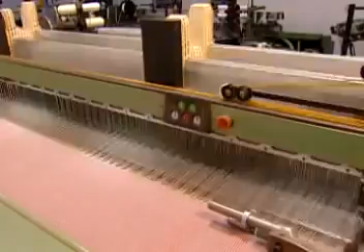In this segment, we describe how filling yarn is actually inserted into the fabric. Several systems are used to insert the filling. These include shuttle, rapier, projectile, air jet, and water jet.

The shuttle loom was the first type of power loom developed. It uses a shuttle, a boat-shaped device that holds a small quill of yarn. The shuttle is the only powered insertion system that carries its own yarn supply across the warp. The maximum speed of these looms varies with fabric width, but most produce between 150 and 200 picks per minute.

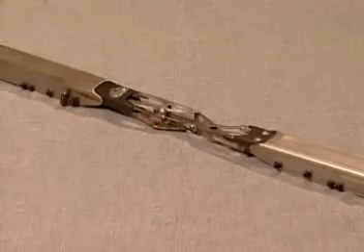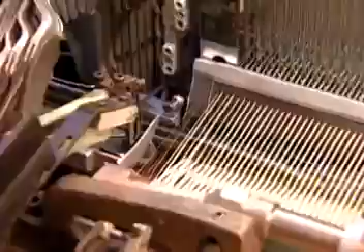Rapier filling insertion is one of the most versatile insertion types. This is due to the rapier head gripping the yarn and carrying it across the width of the shed. Therefore, any yarn, from extremely fine to very coarse, can be woven. Also, very different yarns can be woven from pick to pick without readjusting the rapier.

There are 4 types of rapier systems: single rigid, double rigid, double flexible, and double telescoping rapiers. The single rigid rapier uses a solid rod material that carries the yarn completely across the warp. This loom footprint requires twice the floor space because when the rapier is not in the shed, it is housed in a sheath external to the shed.

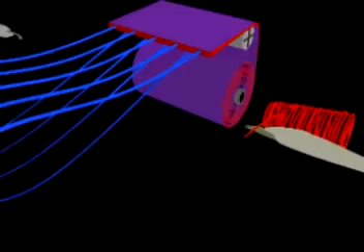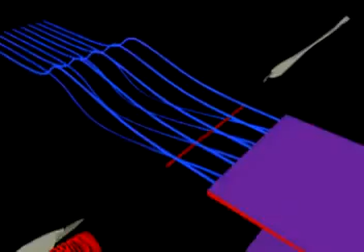Double rigid rapiers use 2 rapiers that are just over half the width of the warp. Each transfers the yarn halfway across the warp shed. This still takes up the same amount of floor space as a single rigid rapier because each rapier is stored on either side of the loom. However, the speed can be increased because it takes less time to insert a pick, since each rapier has only half the distance to travel in the shed.

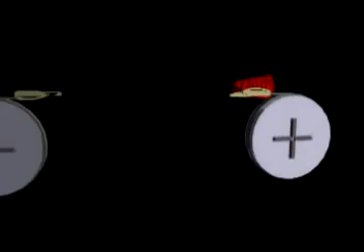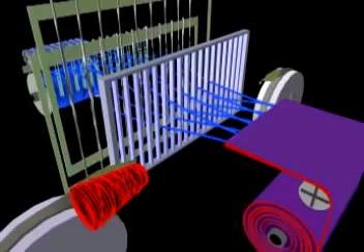Double flexible rapiers use a flat metal tape or high-tech composite material to transfer yarn across the warp shed. The advantage of this system is that floor space is reduced since rapier storage space is reduced. Because the rapier is flexible, it is coiled into a circular sheath when not inserting the filling. The rapiers are much lighter, resulting in higher processing speeds. Flexible rapier looms are capable of reaching 850 picks per minute on single-width fabrics.

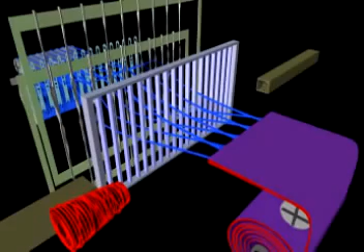Double telescoping rapiers use sliding or telescoping devices to insert the filling yarn. They're similar to double rigid rapiers, but since they telescope, much of their length is stored inside the rapiers themselves as the rapier collapses, thereby reducing the width of the loom. This type of rapier loom can only achieve a maximum of 350 picks per minute due to the weight of the rapier and the time required to extend and contract it.

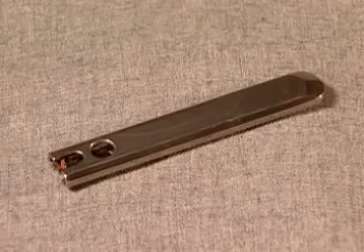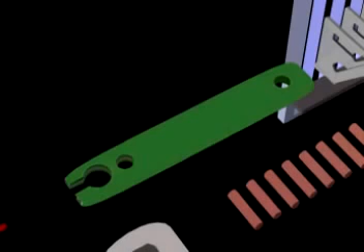The projectile filling system uses a small bullet-shaped object to carry the filling yarns across the warp shed. The bullet, or projectile, is similar to the much larger shuttle in shape. However, the projectile does not have a self-contained yarn supply. It must be presented with a yarn which it grips just before being propelled across the warp shed.

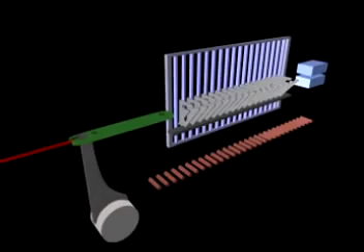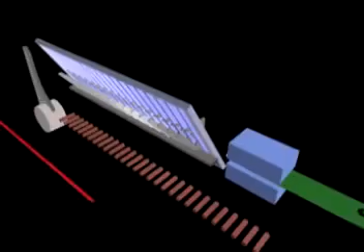A projectile is presented to the picking arm and is fed a yarn. It is then fired across the loom through guide teeth to where it is caught in a braking device. It is then returned to the picking station by way of a conveyor chain. Several projectiles are in use at any time so that rapid pick insertion can occur.

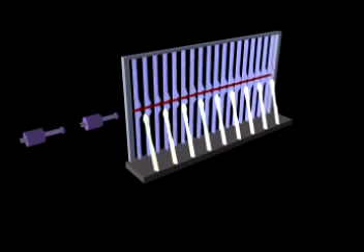Air jet filling insertion uses a stream of high-pressure air to insert the filling yarn into the warp shed. This is the fastest conventional method of weaving. Air jet looms consistently reach production speeds of up to 1,000 to 1,200 picks per minute on single-width fabrics. Air jet looms require very expensive profiled reeds to channel the air and yarn across the shed.

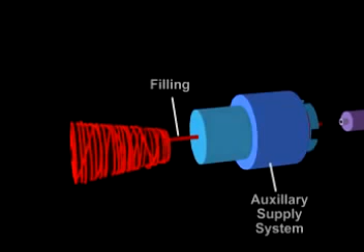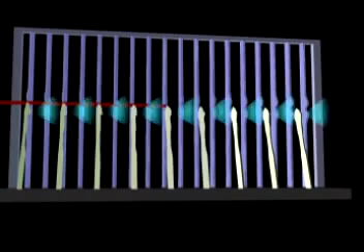Air jet weaving inserts the filling from an off-loom auxiliary supply system that accumulates the exact amount of yarn needed to travel across the shed. An initial burst of air starts the yarn on its way, and several auxiliary nozzles then help propel the yarn completely across the warp. These auxiliary nozzles are evenly spaced and fit into the tunneled or profiled section of the reed.

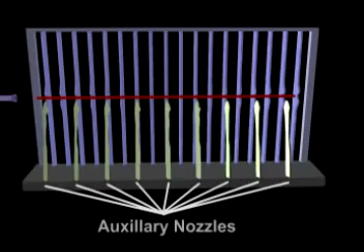Water jet filling insertion uses the same concept of filling insertion as the air jet. Water is used instead of air to project the filling yarn across the warp shed. Due to the higher density of the water jet as compared to the air jet, booster nozzles and profiled reeds are not needed. Speeds of water jet insertion rival those of air jet weaving. One shortcoming of water jet weaving is that only hydrophobic fibers can be used.

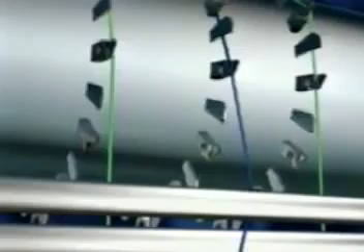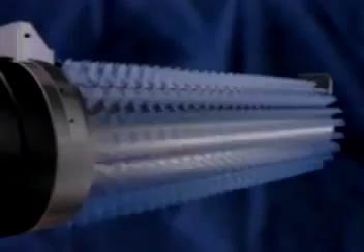Multi-phase insertion is the newest technology for inserting picks into the warp shed. This system uses a series of 4 air jets on a rotary drum to reach a pick insertion rate of up to 2,800 picks per minute on basic plain weaves and twills. Due to its complexity and ability to do only very simple weaves, very few multi-phase weaving systems are in use.